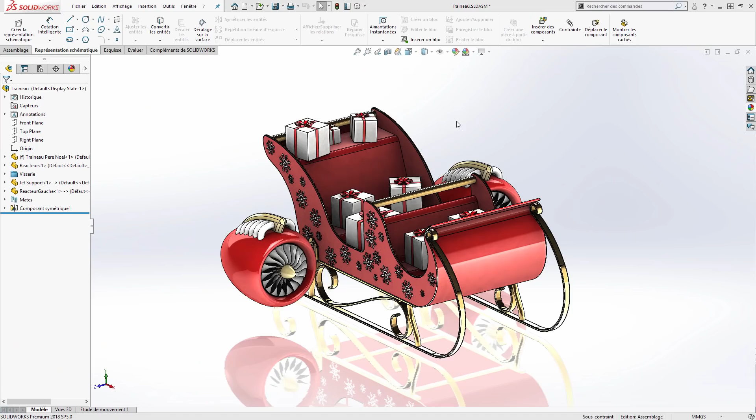Christmas is coming fast, and like all good professionals, Santa has to check his gear. The new jet sled, designed by the elves in SOLIDWORKS, must be tested for the great night. So he did some test flights to avoid any bad surprise.

Everything seemed okay until he lost his right engine when crossing the Alps. Thanks to his tablet, Santa could contact the elves, design a spare part and have it delivered in an emergency. We'll see today how SOLIDWORKS xDesign just saved Christmas.

After an emergency landing on a snowy mountain, Santa assesses the extent of the damage. The right engine support did not resist the last curve. It seems the elf didn't use SOLIDWORKS simulation to check their design. It will be important to include simulation in all designs in the future.

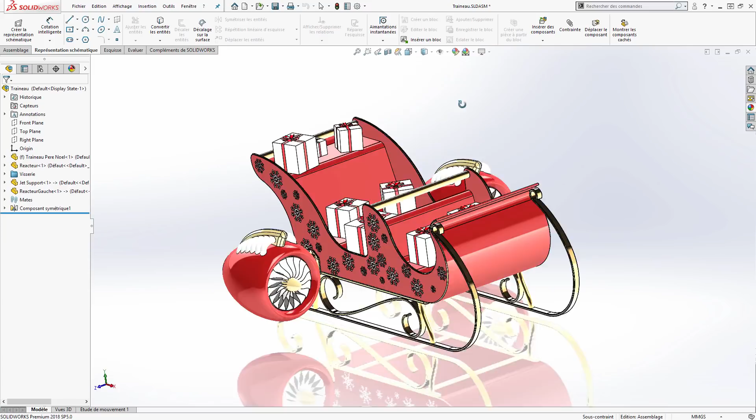Fortunately, he's got his tablet with him and contacts the elves directly with the 3D Experience platform. He posts on the internal community and explains his problem. As you certainly know, Santa is a real handyman, so he asks for the SOLIDWORKS assembly to build the fix himself. The elf in charge of the design puts the SOLIDWORKS assembly directly on the cloud with 3D Drive.

So Santa can open it in xDesign. Since xDesign can understand SOLIDWORKS configurations, Santa opens directly the configuration used for the creation of the engine support. It's a real time saver, especially since it's rather cold on this mountain.

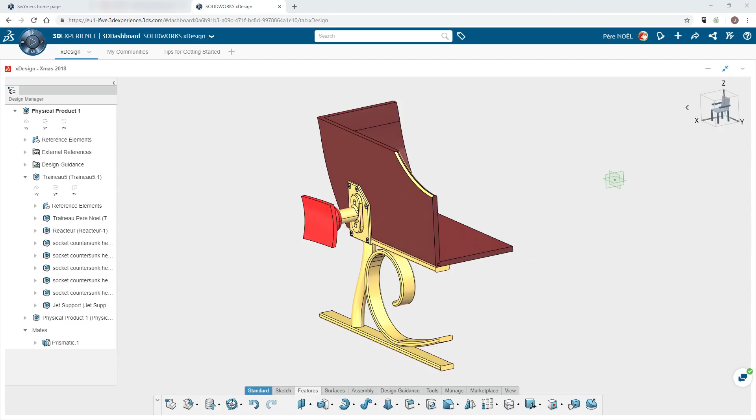In xDesign, he adds an extra support on a rigid part of the sled. He doesn't want to break anything again. Then he simply gives the operating constraints by fixing the supports on the sled and describing the forces of the engine, here the weight and the engine power.

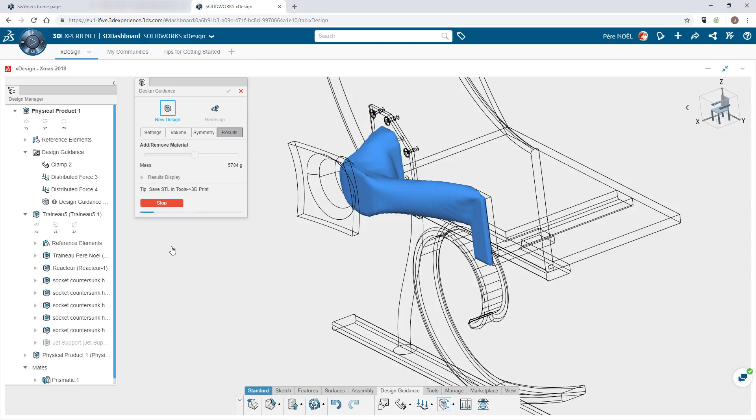That's all it takes for xDesign to propose a better part in a matter of seconds thanks to the cloud. Obviously, this part will support engine power far better than the previous one.

He checks that it can be 3D printed from xDesign and saves the STL file on the cloud with the 3D Drive app. This is the preferred format for 3D printing.

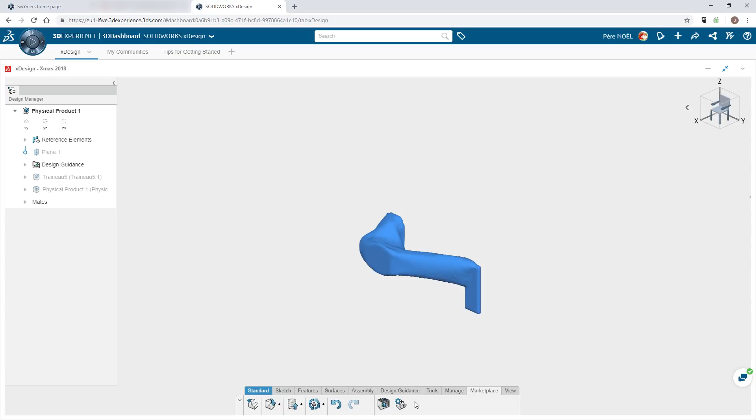Now the part is ready, it must be used in the real world, and to do that, Santa uses the free service to get in touch with manufacturers able to make his part. This free service is called 3D Experience Marketplace.

He can choose his material, here some metal of course, its color, as you know he likes red, and above all the delivery time, because the sun will rise in a couple of hours and he needs to be in the air before any child sees him.

Fortunately, he finds a manufacturer just a couple of miles away, and in a matter of hours the spare part is delivered just in front of the sled. As it is tailor-made, it fits perfectly and he can finally head back to the North Pole to enjoy a hot chocolate with cookies.

He can then explain to the elves what he has done and keep track on the platform. In case these elves are busy with something else next year, others will be able to know why some choices have been made.

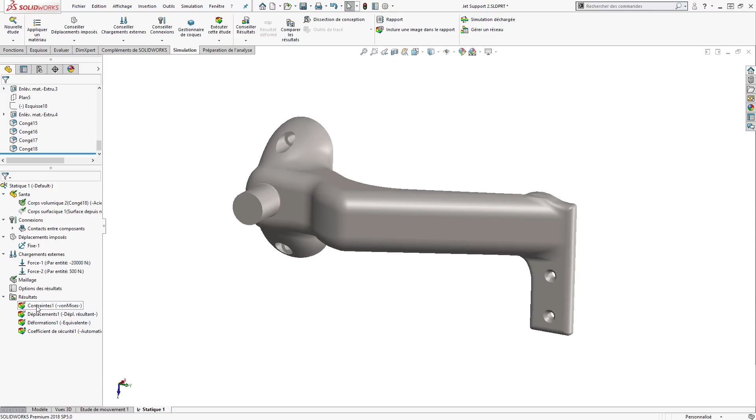By the way, an elf can even design a new part in SOLIDWORKS based on the one created in xDesign, and this time he will use SOLIDWORKS simulation to check it. It needs to be strong enough, but it still needs to be as light as possible. He doesn't want to run out of gas next time.

Thanks to SOLIDWORKS xDesign, we saw how Santa designed a part for his SOLIDWORKS assembly away from his office, no matter the time, and with a simple connected tablet. He stayed in permanent contact with his team thanks to the 3D Experience platform. Then he had his part made and delivered thanks to the 3D Experience Marketplace.

With Dassault Systemes' 3D Experience platform, he could also benefit from much more complex simulation of his SOLIDWORKS assemblies, with large deformations and highly deformable materials for example. Or he could manage his SOLIDWORKS data on the cloud without long and expensive deployment, all while taking advantage of transparent and automatic updates of all cloud applications.